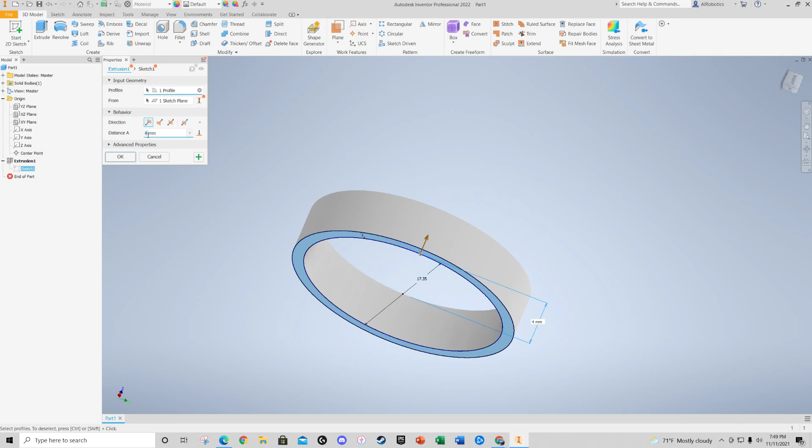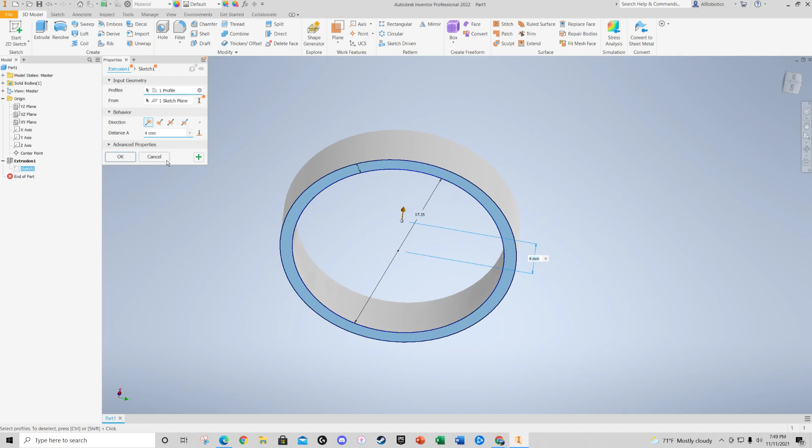So we know the size 7 ring is 17.35 on the inner diameter, and then I made the outer one a millimeter bigger. So then I extruded it, and when I extruded it, I made it about 4 millimeters thick, because they say that most rings are about 3 to 4 millimeters thick wise. When I looked at a tape measure, I liked the thickness of it before. It looked decent, like a good size. Anything thinner just looked cheap, so 4 millimeters this way looked decent.

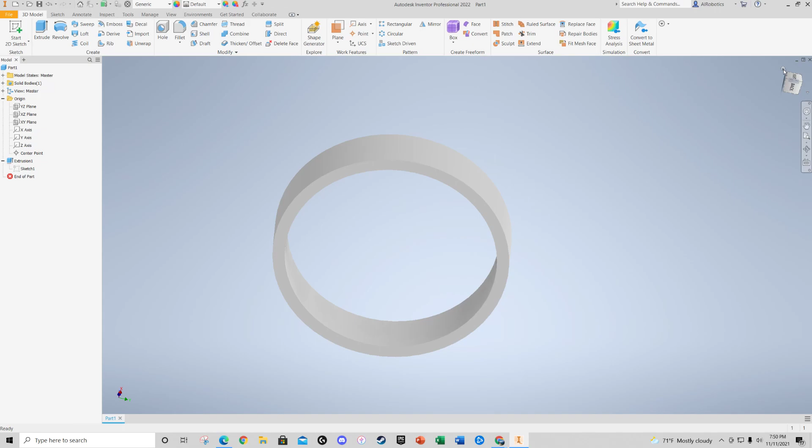So once I did that, all you have to do now to create the emboss feature is create a plane. Offset, we're gonna go through one that's right there, halfway. Hold on, which one is the easiest one to do? Okay, so this is our ring, this is the front of it, so we should pick that plane. Honestly it doesn't matter because it's a ring, it'll be the same each way. So once you have your plane, it has to be halfway.

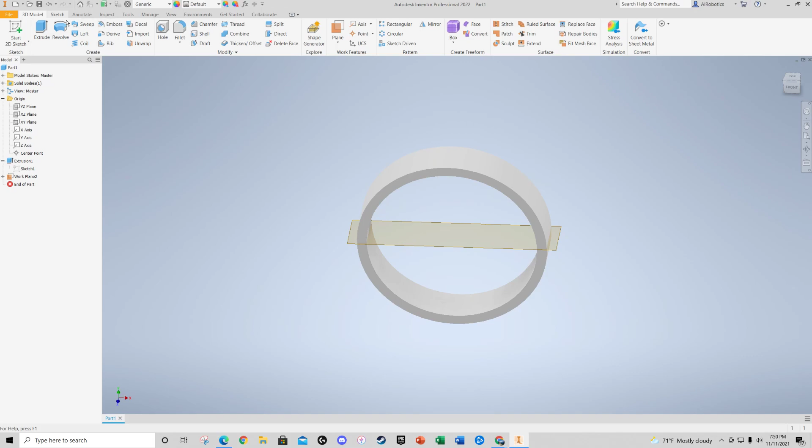Then we go to start 2D sketch on that plane, and that's where you're gonna write your name. Now you can see the ring is in the way, so what I like to do is go to view and change it to wire. It doesn't matter which one, I just use wireframe with hidden edges so I can see things a little more clearly. Let me hide this work plane because it's in the way.

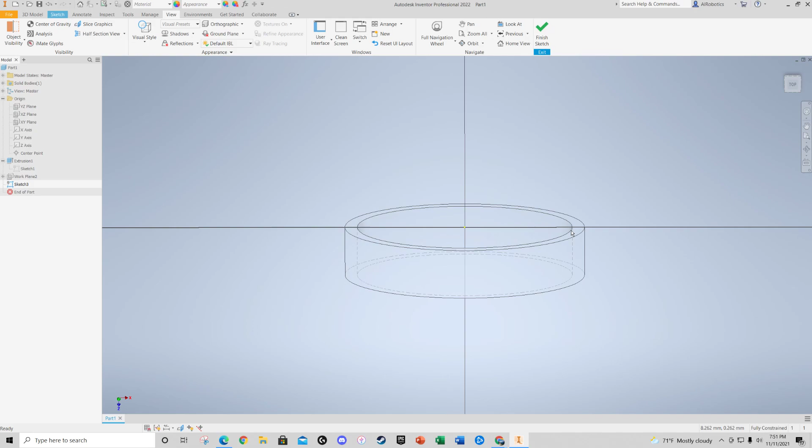So this is the shape of the outer ring right here, and then this dotted line is the inner part of the ring. So I have to make sure the letters stay within the inner part, those dotted lines. So let me go back to top.

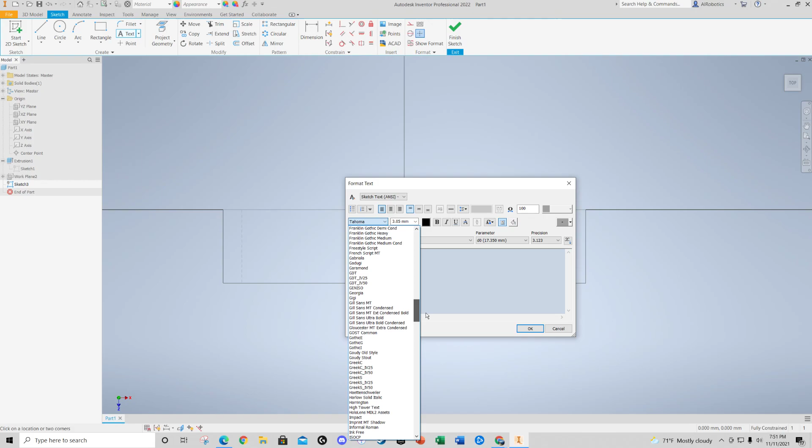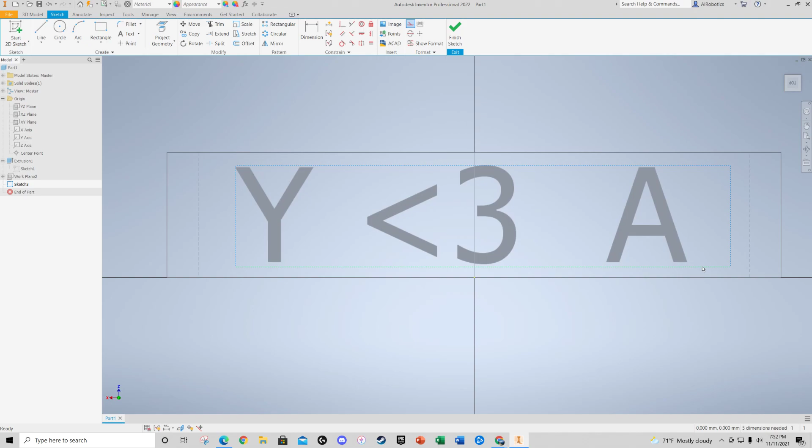Okay, there we go, so then I just center it. I press escape to get out of that tool, and center it vertically. That actually looks pretty darn centered, maybe just a little bit too high. Then I center the distance here. Needs to be moved over a little bit more, a little bit more. I think that's decent, something like that, yeah, looks pretty decent.

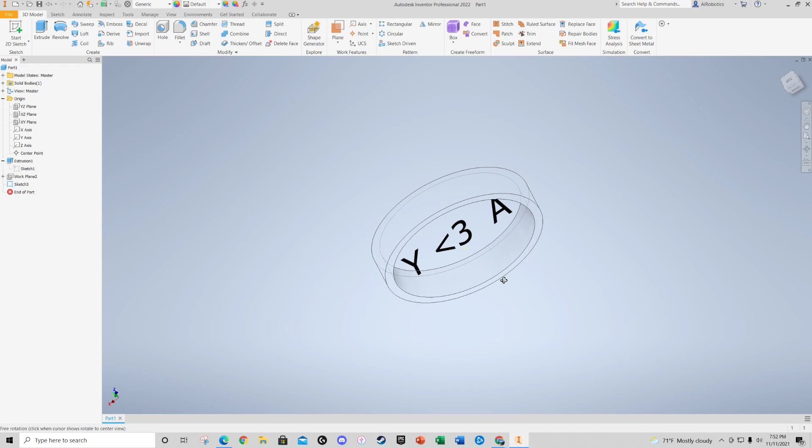Okay, and that's it. Now I'm gonna just finish my sketch. And then all I got to do now, now that I have this, is just press emboss. What I'm gonna do is get this and just slam it down in here, kind of like project geometry. That's what emboss does basically.

So you get to choose whether you want it raised. If you do it like this, well first you have to choose this, right? And notice the little arrow is pointing upward, so it's gonna go to the top. Oh shoot, there it goes, there it is, it's going to go to the top one. I don't want that, so I'm going to choose the bottom face. Well actually, hold on a second.

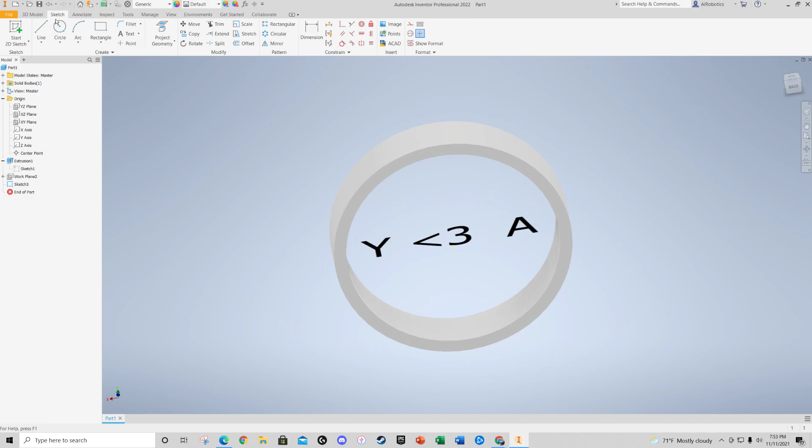Before I even do that, now that I have it all done, let me go to view realistic. Here we go, okay, now let me go back to emboss. So I'm going to emboss this, I don't want it on the top part, I want it on the bottom. If I choose emboss from face and just press OK, it's 3D, but do you see how it gets stretched? Because what it literally does is grab it from here and go straight down, and since this part is on a curve, it gets stretched out, and that's no good. So the only one that looks pretty is the one in the middle, and all the other ones are going to get stretched because they're on the curved part of the ring.

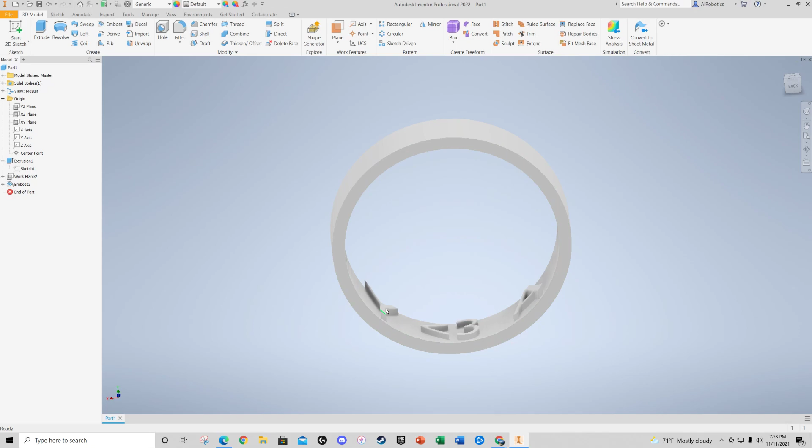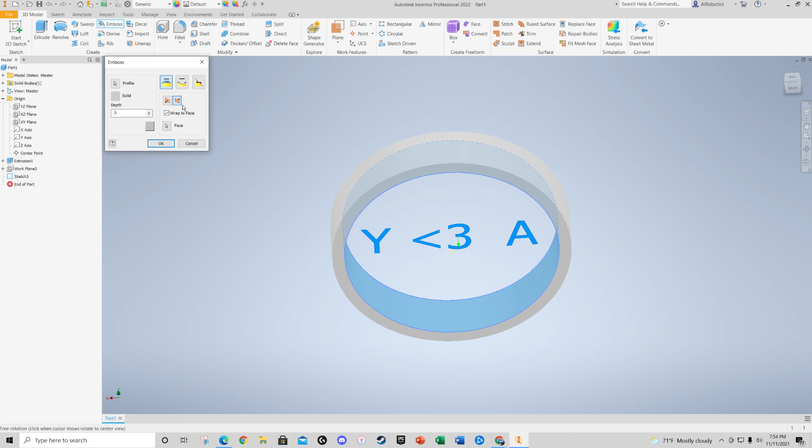So that's no good. What you want to do is, when you have it here and go to emboss, click the thing you want to emboss, then make sure it's facing the right way. Click down, the arrow's pointing down, okay? Then you click wrap to face, and it's going to ask you to choose a face. There it is, that's the face I want. When I click it, I don't know why, it always goes back to up. You always have to make sure that thing's pointing down before you press OK. There it is, I press OK. Now notice when it wraps perfectly around the ring, it's perfectly perpendicular to that face, not stretched at all.

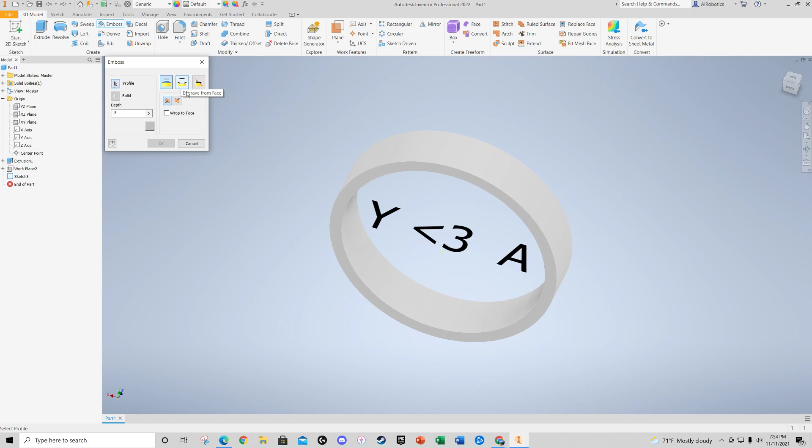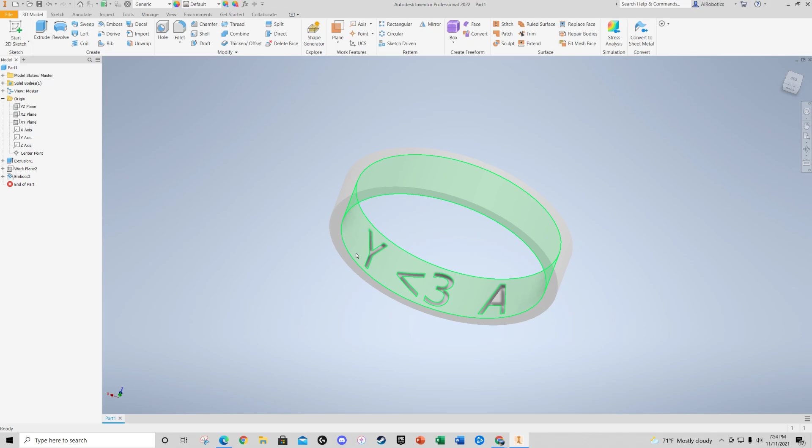It's perfect. Now obviously, you don't want it sticking out, so when you go to emboss, make sure you choose the one that engraves it. Choose engrave, then choose wrap to face, choose your face, and then go to profile. Make sure it's always pointing down, or just pointing in the right direction you want, and then you're done, and you have your thing. Obviously, you don't have to make it that big, you can make it smaller if you want to fit more text. You can put your whole names in there, a date, a quote, a poem, whatever you want. But that's how you do it. All right, man, good luck.